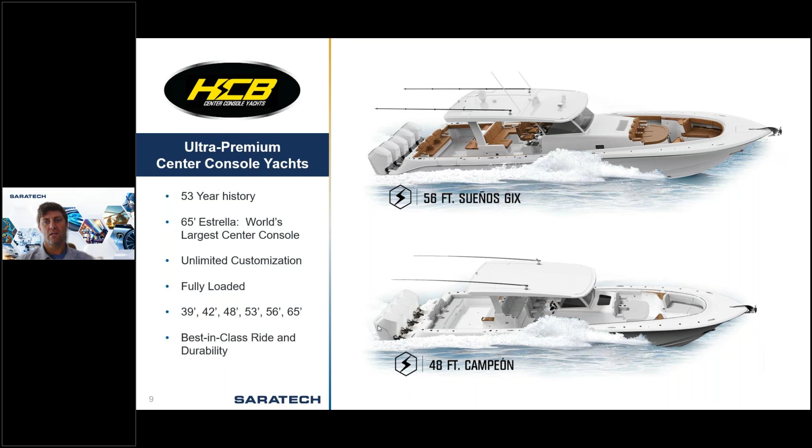So, as I mentioned, the challenge here is launch date. We've got two entirely new models that we introduced 8 months apart. First one being the 48 Campeón at the Miami International Boat Show in February, and then followed by the 56-foot in October at the Fort Lauderdale International Boat Show. So, these are ground up, no reused componentry, pretty tight schedule.

And what we're going to focus on today, it may seem unexciting at first, but it's a great case study. We're going to focus on upholstery. And I don't know if anyone out there is an upholstery guru, but the bottom line is it's actually got a lot more bits and pieces than you'd expect. So it makes a pretty good case study for this methodology.

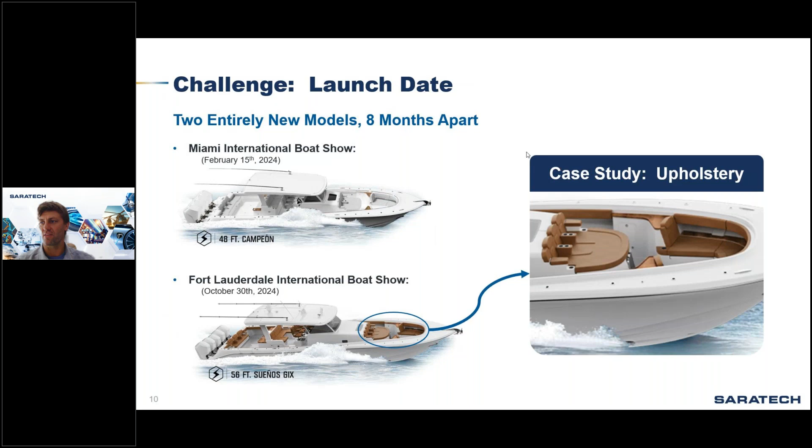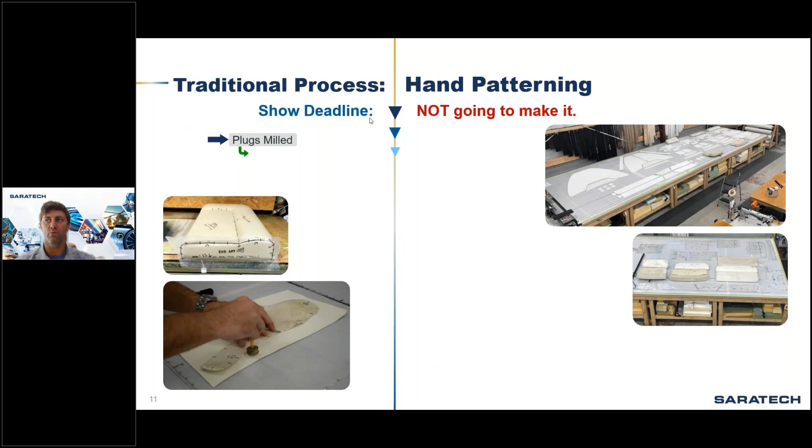So with upholstery, we would look at in the recreational marine industry the traditional process, and this is still going on in a lot of builders today: hand patterning. And if we have a show deadline, hand patterning, I was able to identify really early, was just not going to make the deadline. And that's because it's very much a sequential development flow. You really can't do very many things in parallel.

So from the time that you make your plugs, you make your molds, you make your fiberglass lamination, you've got to pattern the substrates. Well, traditionally they're patterning that by hand. Literally, they still do this today.

They're going in the boat with cardboard and patterning by hand. Well, you can't pattern your foam until you've got your substrates patterned, and then really you probably want to cut them up, digitize them and cut them on the CNC. Then you really can't pattern your vinyl by hand until you've got foam and substrate to sit there and do the hand work, as you're seeing on some of these images, to pattern.

And then, the trim holes in the boat, how are you going to mount these things in the boat? Again, they traditionally hang the substrates in the boat and they hand trace this with craftsmen. And great craftsmen can do a great job of this. But it is a sequential process that's very reliant on hand skills.

So I think most of us on the call are probably past this process and more digital, but it just reinforces the fact, at the end of this, what you always come to in hand patterning is that there's going to be misalignments. You're going to need to tear stuff down and rebuild it. You're going to be drilling new holes in the fiberglass, which ultimately ends up with gel coat repair. So, your schedule just gets drug out to get show ready.

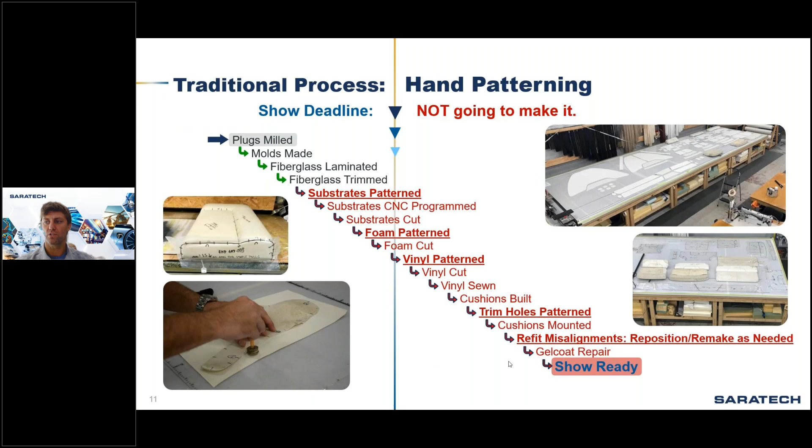Conversely here, we can digitally pattern with our tools, and as a spoiler, it is faster. And the reason it's faster really is from the day plugs are being milled, okay? Like that's occurring, but we've got digital plugs, we've got digital files for those surfaces to go to mill. We can immediately start in parallel substrate patterning, foam patterning, vinyl patterning, and trim holes, all in parallel development with multiple engineers. And we'll talk about how we're going to utilize Wave to accomplish that.

And what that ultimately rolls out into is then we can go directly into CNC programming. We can go directly into sewing and installing on the boat. And time and time again, we prove that we can come out of the digital world with digital trim patterns, with all the digital CNC files, and we can install it first go in a production workflow. Every now and then you make mistakes, right? But generally speaking, there's no misalignments, which means no gel coat repair. We take those entirely out of the process.

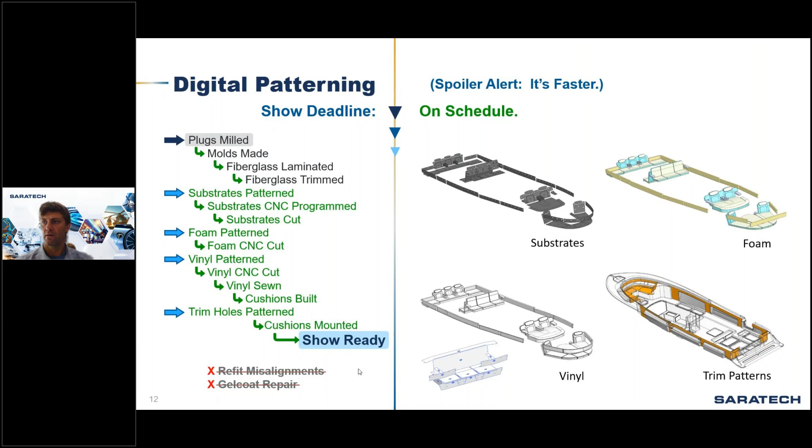Now, I'm going to ask you guys, out of that process, what was left out of the schedule? Feel free to drop it into the questions if you want to guess here. You guys at Realize Live, they all got it pretty quick. Anyone got an idea what I left out of that schedule?

I won't kill a whole lot of time here, but what was left out of the schedule is not a manufacturing step, but it is design, right? So, okay, great. We're talking about how we manufacture all these details, but how did we get to the fundamental design of where we're headed? And again, this is a great part about this process with WAVE linking that we'll demonstrate. How can we quickly develop and approve the aesthetic and functional direction?

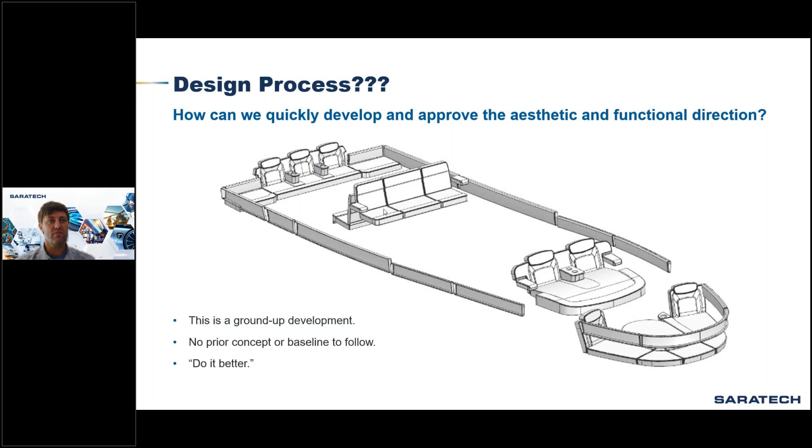So here you have the interior pieces for the 48, the first of the two models we did. How did we arrive at this aesthetic direction? This is a ground up development. There was no concept or baseline to follow. We were just given the directive, do it better. So obviously you've got to concept this, right? And so the solution that I'm proposing today has worked well for me in a lot of scenarios, but I'm going to call this a reference model.

The reference model, we need a concept approval ASAP, right? So I need to be able to present this to upper management and different stakeholders and get refinement done quickly, finally get buy-off on the design, and then commit to the real engineering effort. So who here would believe that design is divine inspiration? Just, hey, I'm a designer, I do great. I'm the first one to tell you it is not. Design is an iterative progression.

And so what we need for successful product design is quick iterations represented with realism so we can get definitive feedback and concept approval. And so here I didn't capture in my process all the different stages, but concept number 1, concept number 2, I've added these details. Concept number 3, I've adjusted some things. But the bottom line is I'm modeling essentially in a reference model, which is a multi-body single part file where I can quickly iterate these concepts directly, linked to the production surfaces, right?

So we're already milling these plugs. We've already sent this out to mill. I've got these production surfaces. I can model directly in there, quick and easy. And I can do this really fast. And moreover, once I've got that foundation, I can make changes really fast, right? So day after day, we can go in for design reviews, finally get buy-in, and we haven't invested a huge engineering effort.

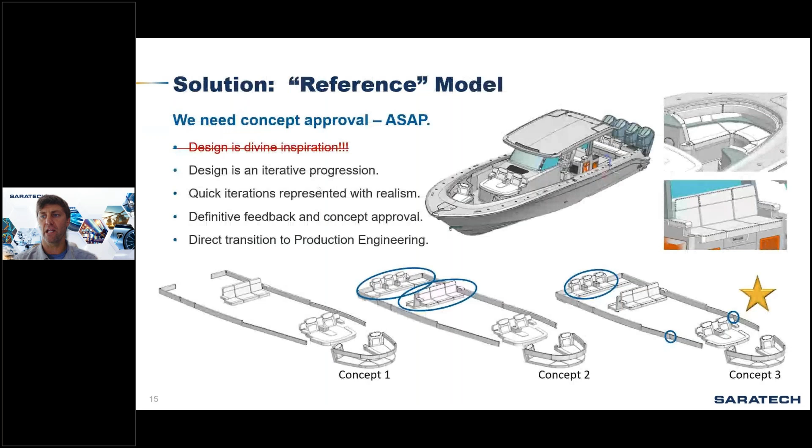The first stage here, now that I've got an idea of where I'm headed with this, now I can put an engineer on Excel or Teamcenter developing part numbers. In the case of HCB, we did use Excel. It worked great. But you can actually see what your part count is, what your assembly count is, right? At the beginning of the design, we had no idea. But now we've got the concept. We know where we're headed. I can grab all these part numbers, right? And I can assign all these, and I can build my structure quick and easy. And now I'm ready to collaborate.

We can basically go into our attributes where we can set up the assembly models and apply the attributes, like ignoring certain things from the parts list, copy pasting attributes. People will say, well, attributes take so much time to populate. Well, not really when you're organized, right? Because you've got a bunch of similar products, and you can copy paste attributes across 50 of them at a time. And so it becomes very quick and easy to populate your attributes.

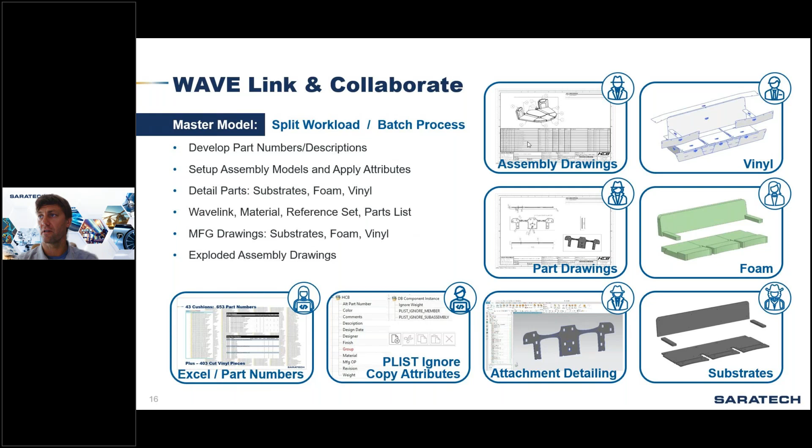And so what I'd like to talk about with wavelinking is there's kind of two ways that I would say you could do this. Wavelinking can be done in what I'm going to call the part context. And so in the part context, basically what we're going to do is create a non-physical assembly. We're going to insert the reference part into the work part, right? So I've got this reference model, right, my concept model. I'm going to insert it into part 1, part 2, and part 3. And then I'm going to wavelink the required geometry in the context of the individual parts.

And then what I'm going to do is define that reference part as what I'm going to call non-physical by 3 actions. I'm going to exclude it from the model reference set so it's never visible. I'm going to change the reference set to empty so that it's not loaded, unless we need to return to it for updated geometry. And I'm going to set the plist ignore attribute so that it doesn't pop up on my plist. And I can do this at the part level. I don't have to redo it every time everywhere it's used.

Now the pros with this direction in terms of part context is that the reference model is available to open directly. It's very easy to see. If I'm in part 2, I know immediately where that geometry came from, and I can just open it. And I can go edit that geometry, and immediately part 2 is going to update.

The other pro is that the link is not dependent on any other assembly, right? So the wavelink is in the context of the part. It's not in the context of the assembly. So it doesn't matter what I'm doing with my assembly structure now or in the future, the wavelink will stay alive. Now the con, it's a little bit slower process because there's more mouse clicks because you have to do this over and over and over, right?

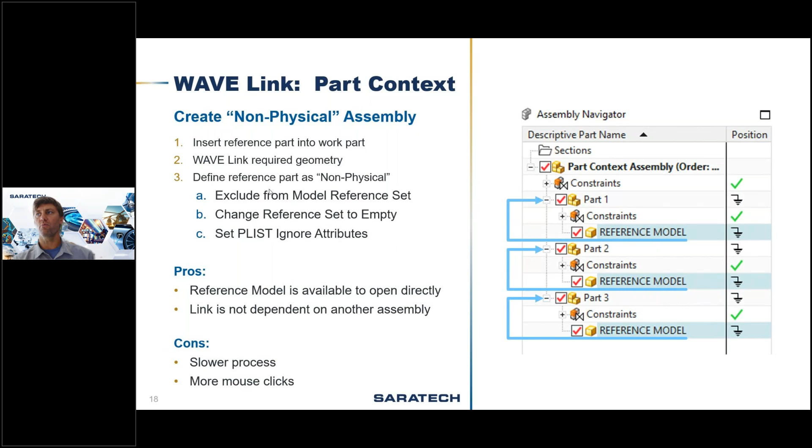Now the other way that we can do WAVE linking, and this is what's really, really cool about NX, you can WAVE link up or down the assembly tree at any level you want. And it's all just as robust as any other direction, right? So you're not sacrificing in terms of stability of your files or performance or anything like that. But we can WAVE link in the assembly context.

And so here, what we would do, we've got an assembly, we'll put that reference model at that assembly level and also on the same level as our individual parts. And then what we can do here is we can make each part the work part and WAVE link the required geometry. So if I want geometry from reference model into part A, I just double click and make part A the work part. And then I can WAVE link the geometry I want from here into part A.

And then I can go open part A in its own window if I want to, and I can work on that geometry to grow it. Now the pros of this, that it's faster. There's no non-physical steps, right? Like you're putting it here one time, you're excluding it from the model reference set, but then in each of these instances, the WAVE link geometry doesn't require any other action to be accurate to the physical production.

The con of this direction, the linked geometry in the child parts is dependent on the assembly, right? So this assembly has to be alive in the same order or you'll break the links. And then determining the geometry source from the child parts requires viewing the information dialog. So if you're in part A, right, and you haven't opened this assembly, this part isn't loaded.

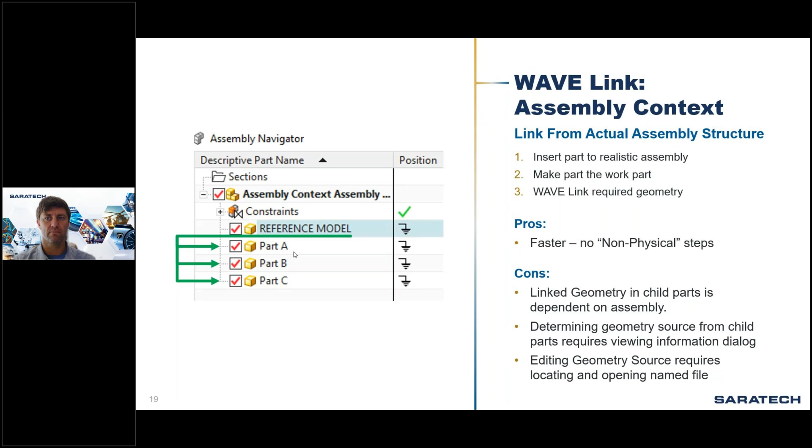Now, let's talk about those WAVE workflows in a real world situation. So we can go up or down the assembly tree. And you might ask, why would you want to go up or down the assembly tree? Like, what would be the use cases? So recreational boats is a great opportunity to describe that. Typically, in developing a boat, we would start with a hull. That's going to be our foundation, our running surface, right? That's the platform that everything else is built on.

And so we might design what we would call the hull molded part. So this is a hull that is just the surfaces. They haven't been trimmed yet. It's what everything's going to run on. And then what we would do in terms of making the assembly realistic is, within hull molded, we would go down the assembly tree. We would put the hull mold in the hull molded part, right? So this is the tool that we would make this fiberglass part from. It lives here as a child in that assembly.

We're WAVE linking that geometry into the hull mold. And then we're also going to WAVE link this geometry up the tree into a hull trimmed. Okay, and this is really a critical piece that I think a lot of industries can use, and definitely composites. You have a molded geometry and then you have a trimmed geometry, right? You're gonna drill some holes in this, you're gonna saw some stuff off it. So by separating this assembly level, we avoid circular relationships, okay?

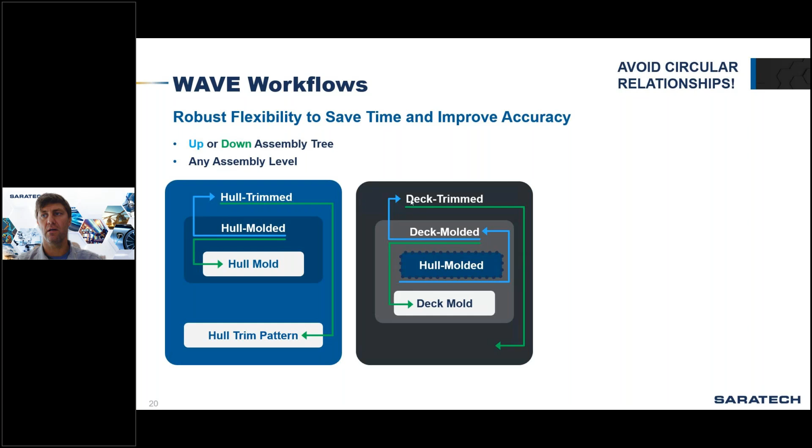I can then wavelink the finished molded deck geometry down to the deck mold. I can wavelink it up to a trimmed deck or multiple trimmed decks, and then I can wavelink that down to deck trim pattern. So the flexibility to go up and down the tree really allows us to get this realistic assembly that is very robust and avoids circular relationships.

So like I'm saying, I would call this a non-physical assembly, where we create the assembly, we wavelink the geometry we need, and then we do those 3 steps. We exclude the model reference set, change the reference set to empty, and ignore the P list on the component attributes. So that hull mold lives here, but it's not actually part of the bill of material or physical assembly.

And then this will go over here in the boat assembly. We have a hull assembly and a deck assembly in most simplified terms, and inside those we have hull trimmed and we have deck trimmed. So that may be familiar to you or unfamiliar, but the point is wavelinking up and down the tree.

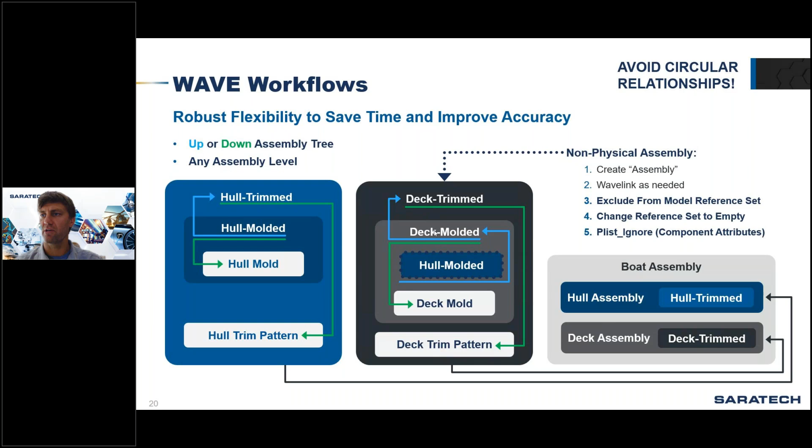The next thing I would talk about: another benefit of doing this reference model kind of workflow is that we can look at a time study. So how many hours is this going to require? How are we going to get it done on schedule? I can do a small isolated project and I can evaluate my schedule with that. I then know per cushion how many hours are involved. I can extrapolate that and I can plan for the full load of the larger project.

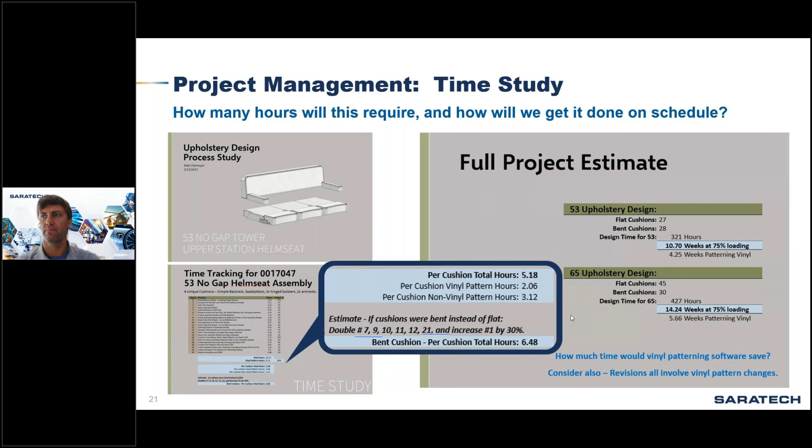But here we're looking at a process where in the 48, there are 43 cushions, which involve 653 parts and assemblies and 403 total vinyl pieces. That's 1,056 part numbers, which is why upholstery is a good example of this. This is a big chunk of work that can be divided up.

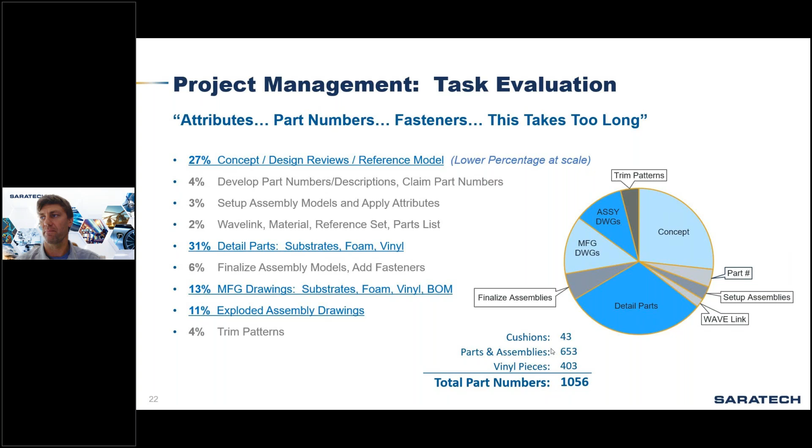So in the case of HCB, we did one boat. Now we got to do it faster. We're making a bigger version with the same concept. So what can we do to get this done faster? Well, the concept goes faster because we're just copying geometry, right?

So a lot of what I could do is a reference model. I can just do a save as of that reference model, and I can go in and use synchronous modeling, etc., to just modify, right? So I wasn't remodeling the concept from scratch, so that saves a lot of time.

Detailing the parts. So now, and this is what we'll walk through, because I had a smaller team for the second project, I chose to just put more detail into the reference model. And I'll show you what that looks like. I cut roughly 5% of my time out, but we'll look at the pros and cons of what that got me. And then also here we looked at saving time on manufacturing drawings.

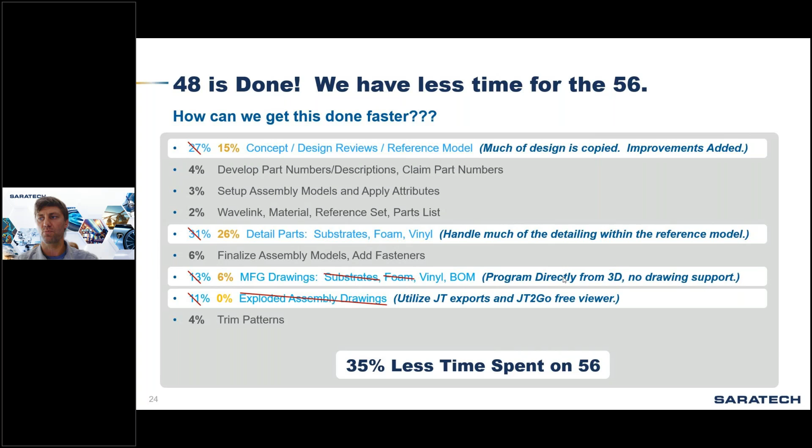Well, for substrates and foam, we were able to just program directly from the 3D with no drawing support. For vinyl and the bill of material, we still needed the output, but we cut 13% down to 6 by just using basically model-based definition. Here's a 3D model, mill it. You don't need a drawing.

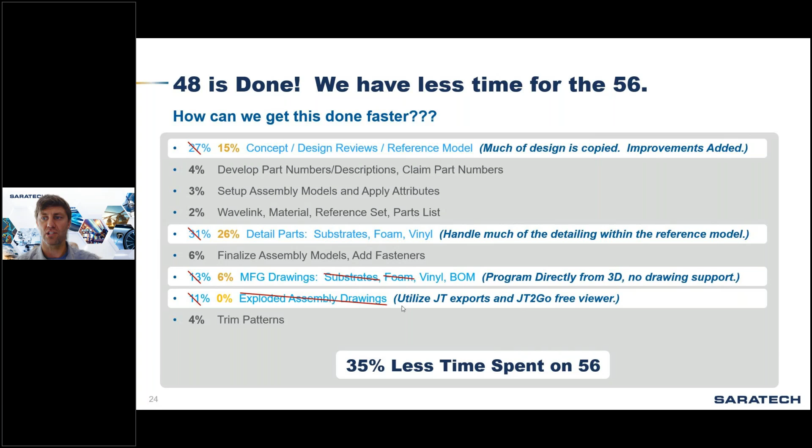Same thing with exploded assembly drawings. Instead of spending 11% of our time there, we spent 0% of our time, and we utilized JT2Go; basically the production floor had the 3D model, and that's how they knew how to put it together. So 35% less time.

On the 56, I went ahead and broke it down into foam, vinyl, and substrates, and did some of the substrate level detailing. And so what that does is it allows me to consolidate operations, right? Instead of wave-linking this body into 3 different parts and cutting it in 3 different assemblies, I can now just cut it one time, and I can wave-link specifically just the body I want. So it's faster, but here's what we learned.

So with revisions, what we found is it's really best if you take this approach to just apply synchronous modeling or other tools at the end of the feature tree, rather than rolling up to a fundamental change that's going to break a bunch of stuff. Just leave it alone and go to the bottom of the tree and add features. It tends to be faster in some cases. And you organize the model with reference sets.

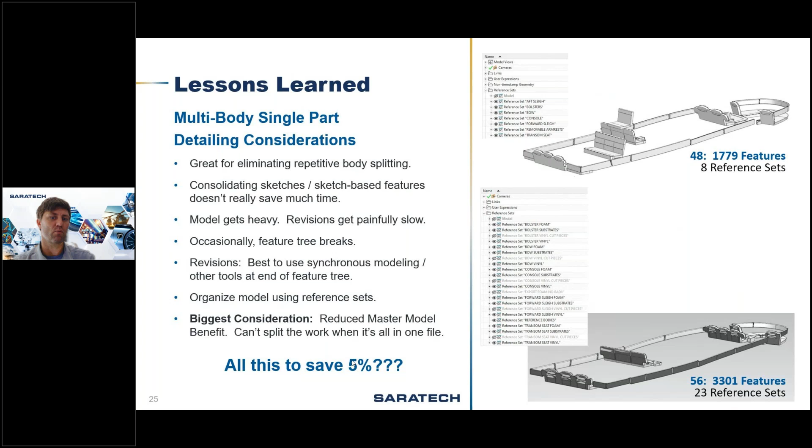Man, this is great. Can we get this on all the other models? And that was legitimately the question. Even on the existing models, they're like, man, this helps me so much and it is so easy to use. They didn't have any trouble learning how to use JT2Go to navigate that model with a space mouse. It took them a minute to get used to a space mouse, and I've seen this at a couple of places.

And the bottom line is, production people want to do their job well, but doing their job well requires clear instruction, and that takes a lot of time to develop in drawings. When you just give them the 3D model with a JT, it's all there and it's all visual, and so that really helps. So, the paid way to do this, get everybody on Teamcenter. If you can't get that past your budgets, you can get JT2Go and just put those JTs in a production server location.

Now, what I'll do is I'll talk about an alternate task here that we did of a hinge. Let's see here, I've got to get these videos to load. Come on. We did a little run-through and these videos, there we go.

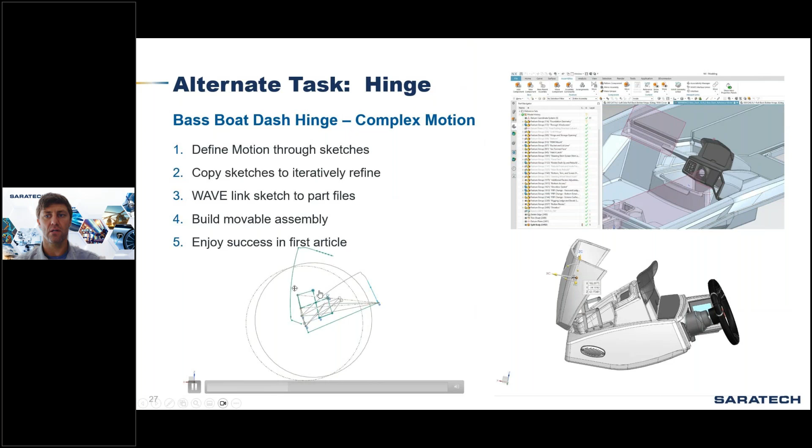And on the very first article, this worked exactly as intended, right? So I don't know another way to really achieve that kind of complex motion, and definitely as fast as you can, by just having sketch geometry and then WAVE linking that.

Another example here is the suspension seat for that bass boat. So we did a custom suspension in a resin infused fiberglass hard shell, and this was just a goal, right? This was on paper, we want a resin infused hard shell and we want a custom suspension. How do you achieve that? And we want it super lightweight. It has to be a lightweight seat.

And so it was really kind of faster and easier to conceptualize this in a multi-body single part. It's kind of an isolated project. One guy working on it. Just get this figured out, right? As fast and easy. And then you know where you're headed with your assembly. Then you can build out that assembly tree, WAVE link the parts, detail what you need to detail, and that makes a really good workflow.

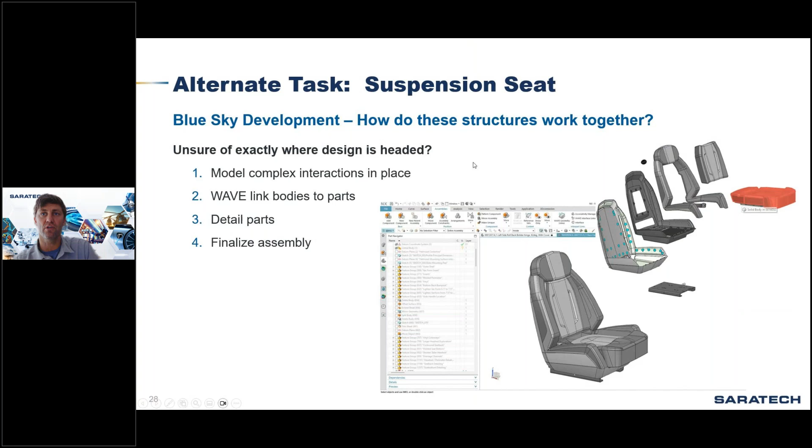And ultimately here, we brag on digital twin success, not just in terms of these projects, but just in general. We would say Icon brand launch. So Ed Miller is a great friend of mine in the boat industry. He's been around a long time, done a lot of stuff by hand, and he is one of the guys that says, well, that won't work, and here's why. And he's not wrong. He came out at the end of this build and he said, this was the best first article I've ever been a part of. Everything fit.

We weren't trying to figure it out on the first article production floor. And the reason is that high level detailing is efficiently achieved in NX CAD with Teamcenter data management. The workload is distributed, so we can have multiple people contributing collaboratively and simultaneously to catch their mistakes and improve ideas. Issues are easily identified and efficiently resolved in the digital twin. Way faster to change a fiberglass surface in the digital model than it is once you've milled a plug and made a mold and made a fiberglass part. Now you've got to make a change.

Ultimately this rolls into, I'm going to call it 10 times time savings, and a huge cost savings as compared to resolving mistakes on physical builds. And this was what Ed was getting at. Every hole we drilled in this thing was drilled off a trim pattern. The parts bolted in, they fit, they didn't interfere. There were literally no holes on this entire ground up boat that had to be repositioned. We just built it from day one, and it was essentially production intent and no changes.